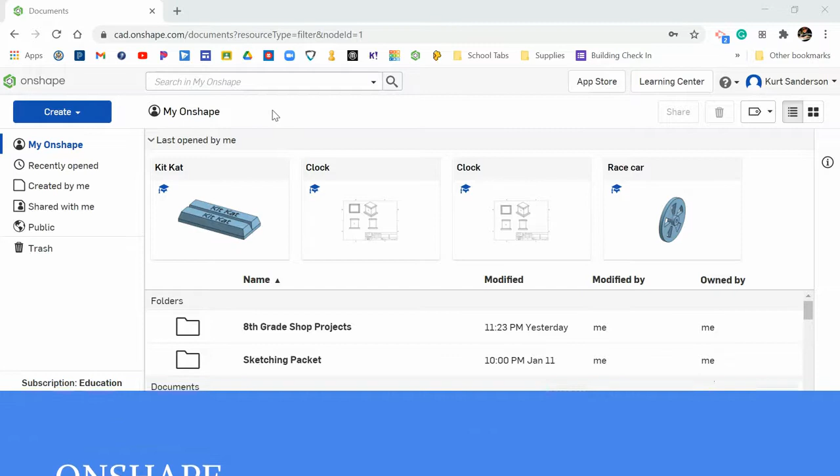Welcome everyone. We're going to be making the desk caddy project together in Onshape. From your Onshape dashboard, let's click Create Document and name it Desk Caddy.

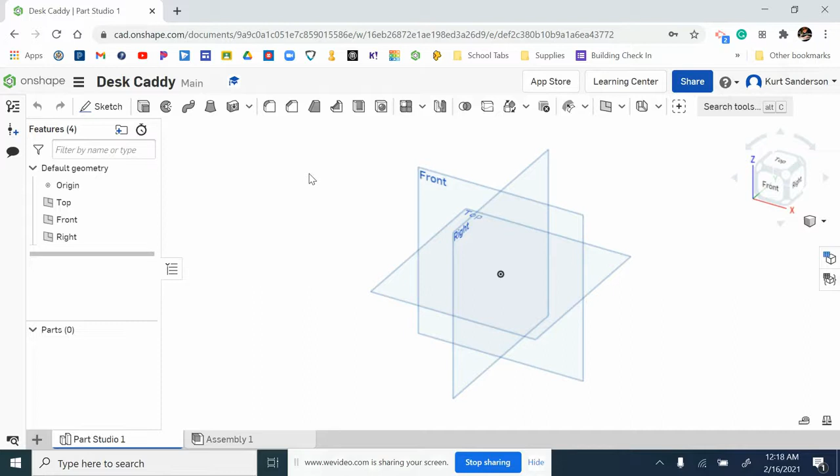From here, you can see your front, top, and right side planes, and we're going to sketch on the top plane. First, let's select Sketch, then click on only the top plane once with the left mouse button. You'll see that Sketch 1 aligns itself to be on top of that top plane.

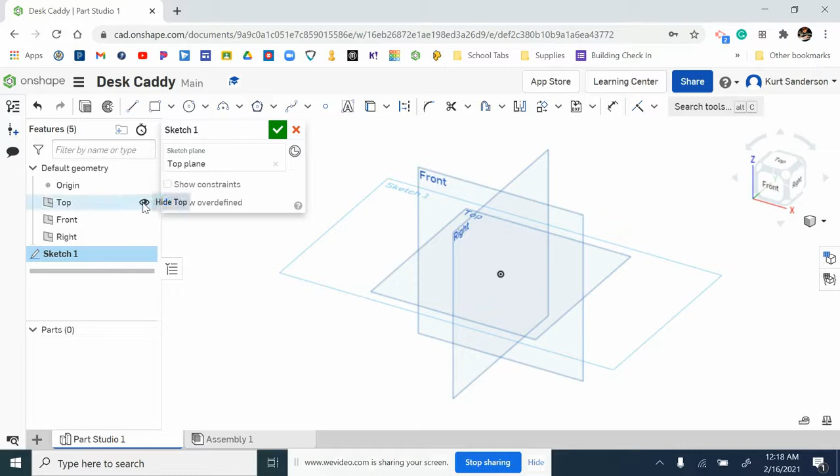Okay, we can turn those planes off to clean up our view here. Let's turn the top off, the front, and the side, so we're only left with Sketch 1. I'm going to right-click on Sketch 1 and view normal to the sketch plane. This is as if we were drawing flat on a desk now.

We're going to click on the corner rectangle tool, left-click the origin once, move your mouse. This is not a drag, this is a move. Move your mouse out, left-click again.

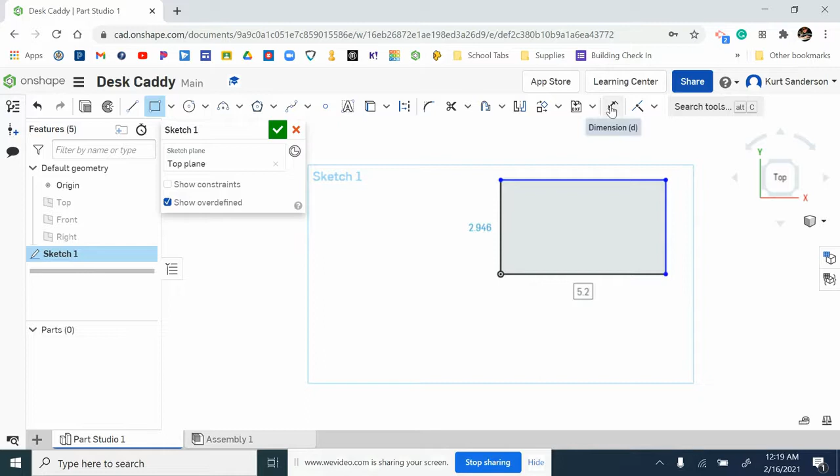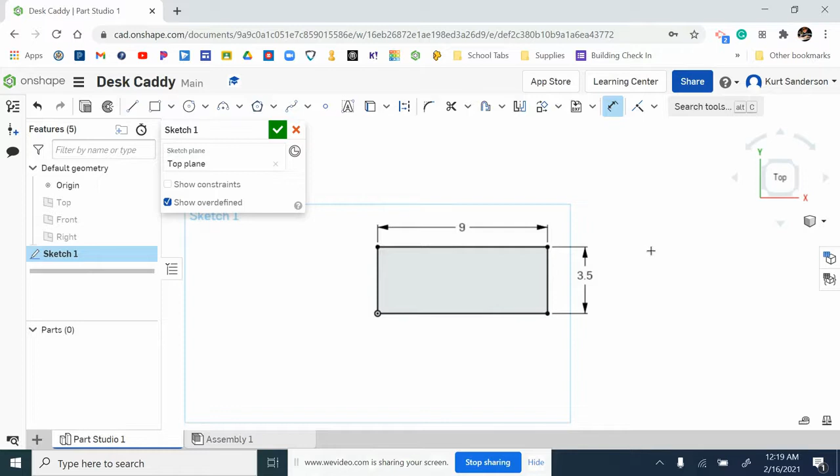Okay, we're going to click on the dimension tool, dimension the length. I'm left-clicking that top line, moving my mouse up, and left-clicking again. The length should be 9, enter. And the width should be 3.5, enter. And that sketch is done, so we can finish it with the green check mark.

Okay, so this is our two-dimensional view. You can see our view cube is showing top. We want to go back to our isometric view so that we can see more than one perspective.

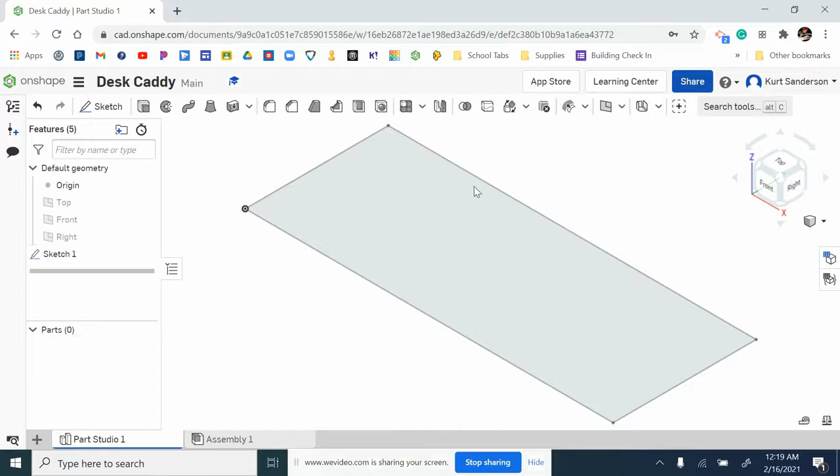Okay, we're going to extrude this rectangle, left-click inside of that rectangle, and then specify the depth. This is the thickness of the piece of wood as 3/4 or 0.75. Finish that feature with the green check.

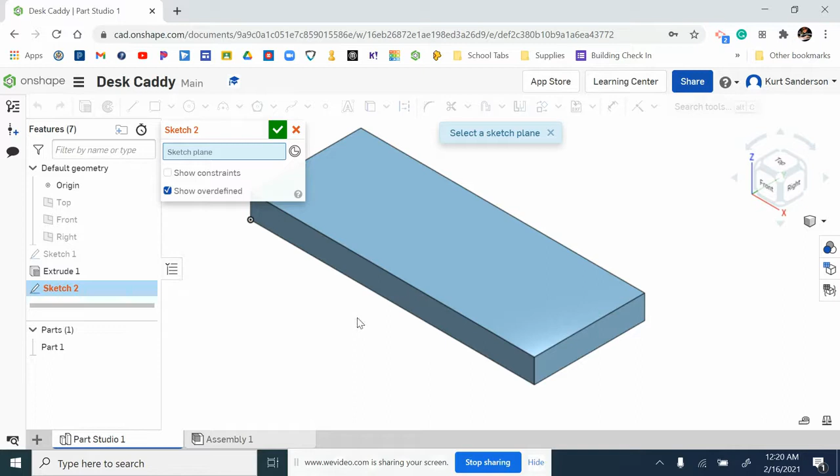Okay, we're going to start a new sketch, but this time we're not going to be clicking on one of those planes, top, front, or right. We're going to be clicking on the top surface. We want to do a sketch on the surface. So Sketch 2 aligns itself with that surface, and we can right-click, view normal to the sketch plane, as if we were drawing flat on our desk again.

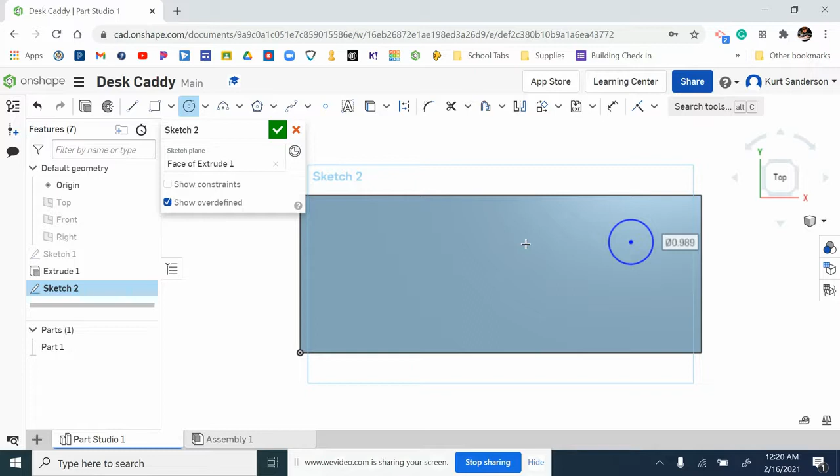We're going to grab the circle center point tool, and we're going to left-click, move, left-click. It's a random size in a random place. We're going to dimension it using 3 different dimensions.

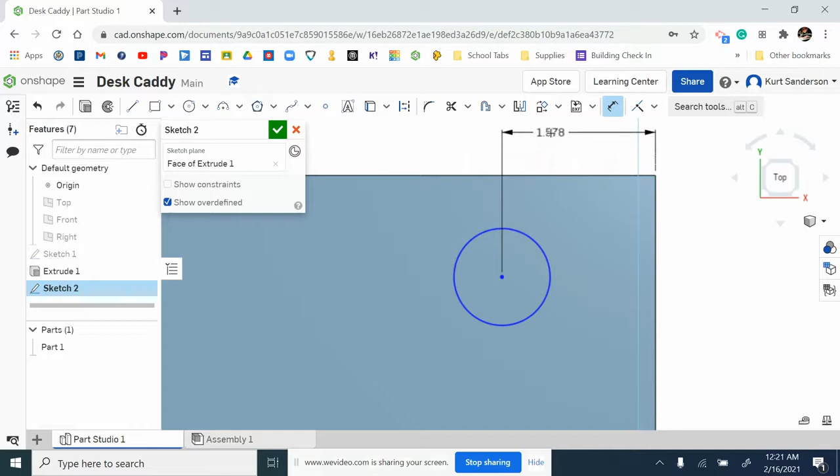Left-click the dimension button, I'm going to first click the corner point and then the center point. That's going to give me, if I move my mouse in the right place, a horizontal dimension. I can left-click right there, and I want that distance to be 1.75.

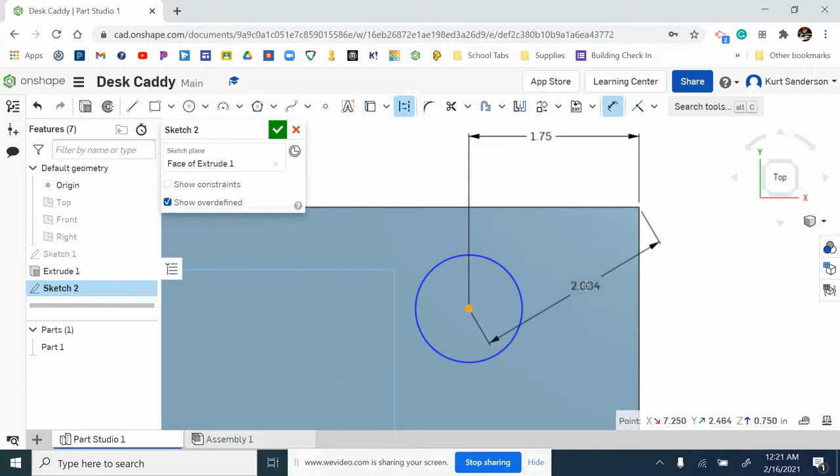I'm going to click on the same 2 points. My dimension tool is still highlighted, so I'll click corner point, center point again, and I'm going to move my mouse. I'm not dragging, I'm moving over to the side, left click to place it, and that distance should be 1.5.

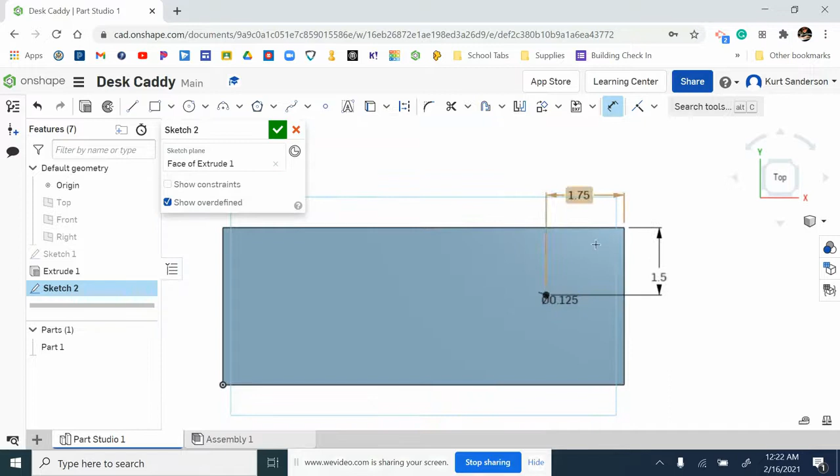Okay, this circle is much too large, so I'm going to click on the edge and specify a 1/8 diameter circle. Okay, it didn't go away, it's just quite small. Okay, so this sketch is done. Green check to finish. And then I'm going to extrude.

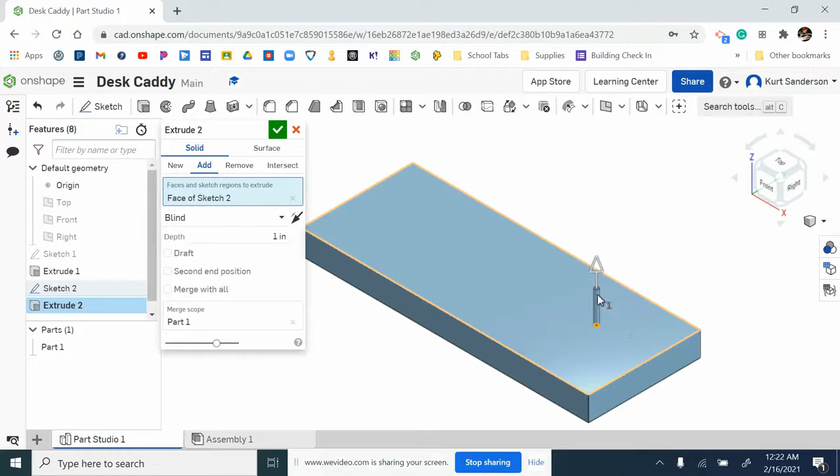I'm going to zoom in and click on that small hole. And if we go over to our isometric view, you can see that the computer thinks we want to add material, but we want to remove material. We want to drill through that piece of wood. So remove, green check. And you can see that it goes all the way through to the other side.

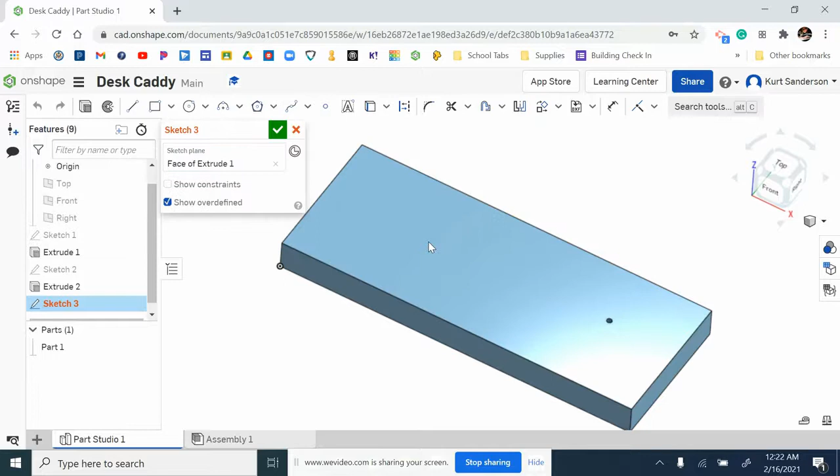Okay, we're going to create another sketch on this top surface. So left click, we have our third sketch. Let's view that normal to the sketch plane. We're going to create a center point circle somewhere in the bottom left-hand corner. So I will left click, move, left click again.

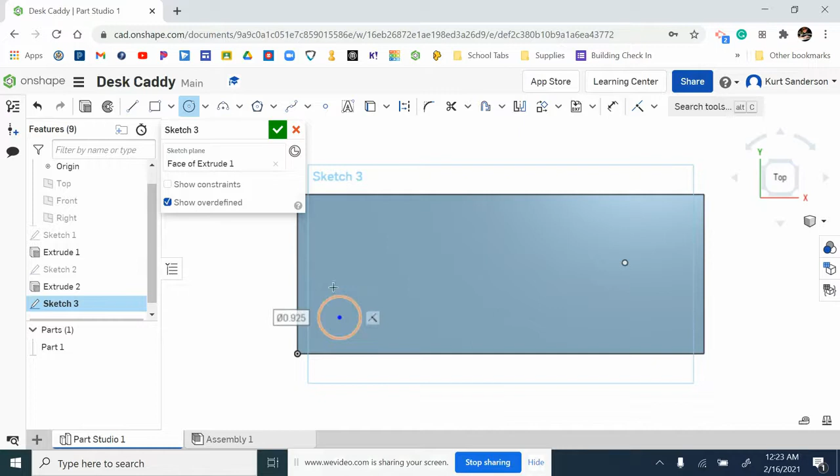All right, just like we did for this circle, I'm going to place 3 dimensions on this circle to get it into the right spot. My dimension tool is highlighted. Make sure that you're selecting your corner point, not the edge, but the corner, center, and I'm moving my mouse over, and I'll specify 1, enter.

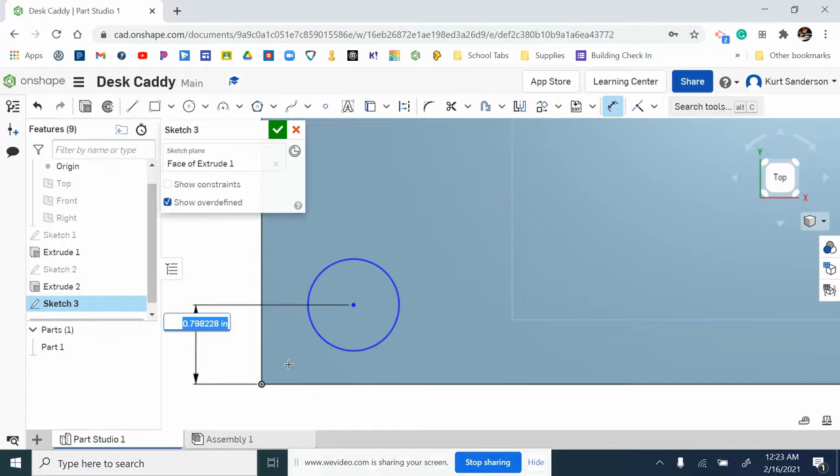Same 2 points, corner, center, move down, 1, enter. Lastly, I'm going to specify the size as a diameter of 1/2.

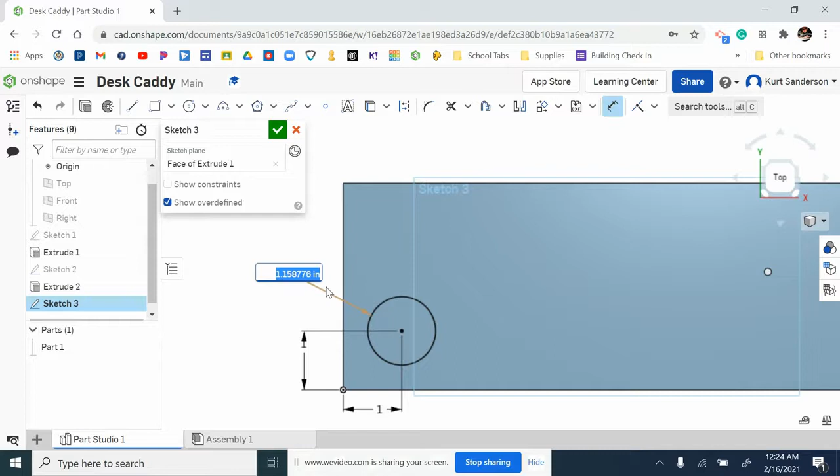So I want the exact same circle, the exact same size, in the exact same place on the other side of the part. So we're going to do what's called a construction line.

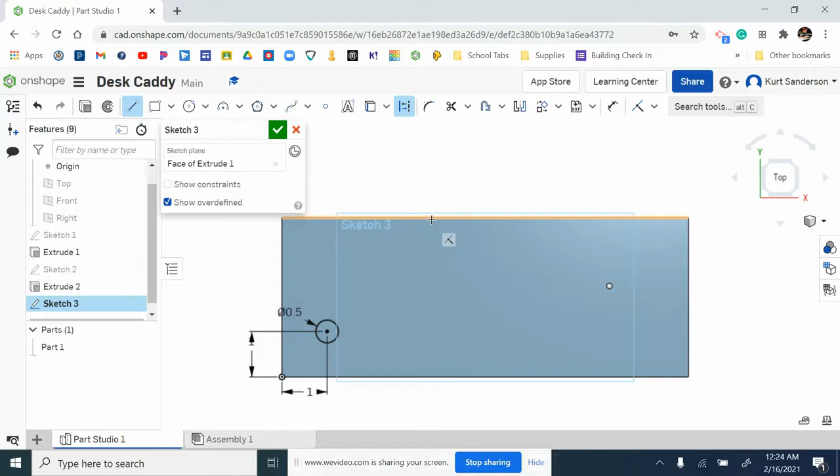I'm going to click on my line tool, select construction. I'm not clicking yet, but I'm looking for the midpoint. The midpoint will pop up as a yellow square. Now I can left click, bring my mouse down. I am not dragging. Bring my mouse down and left click again. And I will escape that tool.

I'm going to use my mirror tool and follow the commands. Select a mirror line - I'll click on my construction line here. Select entities to be mirrored - select my circle. Voila. I will escape out of that tool. If you are in a tool, if you select it again, it will get you out of that tool.

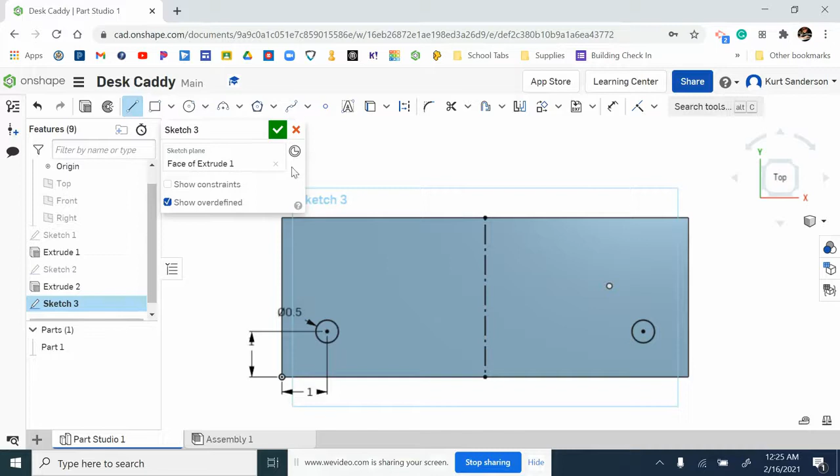I'm going to take my line tool, zoom in a bit, and I'm going to hover. I'm not clicking, I'm not dragging, I'm hovering over that center point, and I'm moving my mouse up. You'll see a dotted line. Once the center point and the circle are lit up, I'm going to left click.

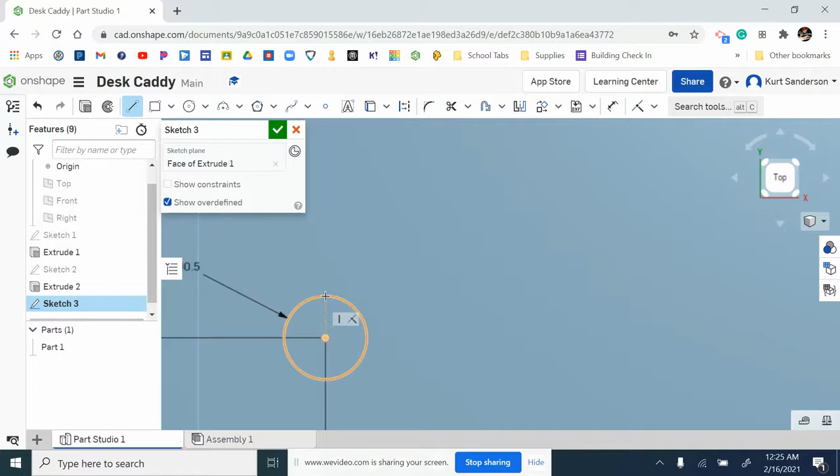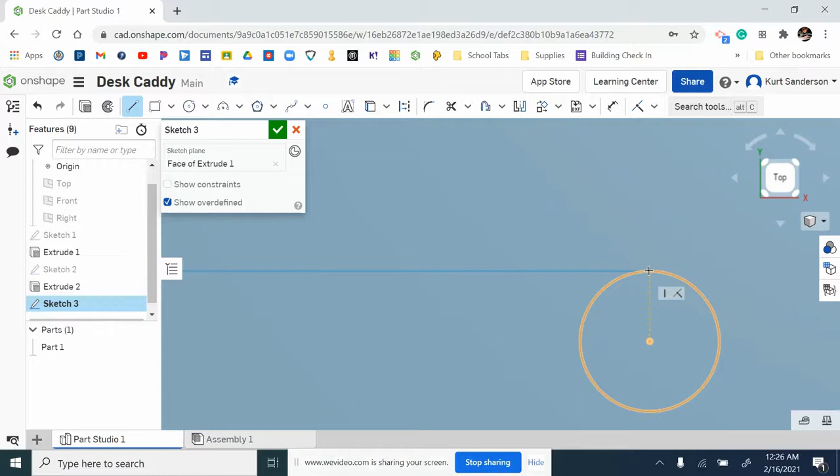I'm going to move all the way down to the other side and do the same thing. I'm not clicking yet, not dragging. I'm hovering and then moving up. When that center point and circle are illuminated, I will left click.

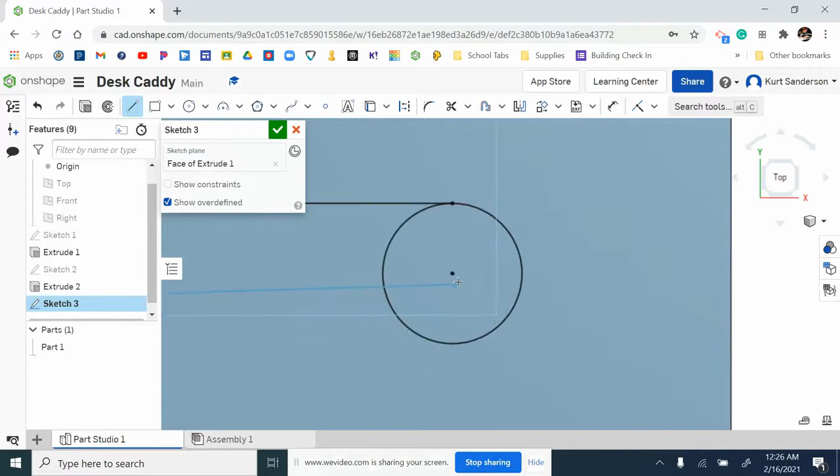I'm going to do the exact same thing on the bottom. I'll select my line tool, hover over the center point and move down till they're both lit up. Left click. Travel all the way down to the other circle, hover, move, click.

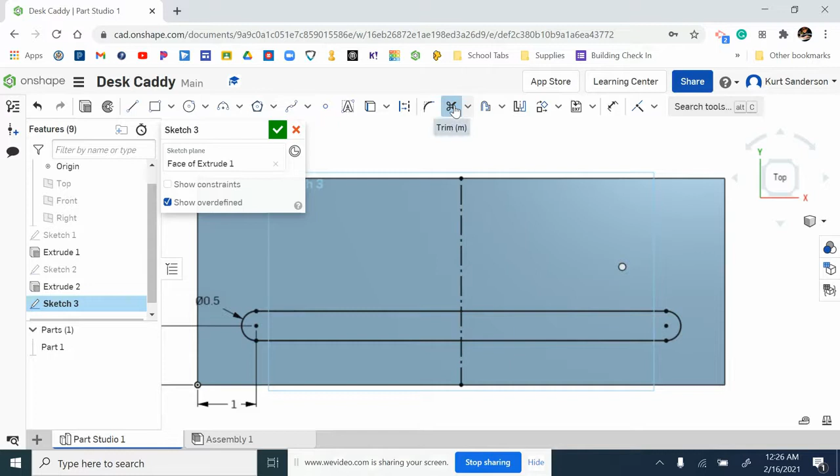Everything should be black. I'm going to trim using the scissors the inside of those 2 circles, and I can select that trim tool again to get out of trim. So this sketch is done. I can green check mark. I'm going to go back to my isometric view.

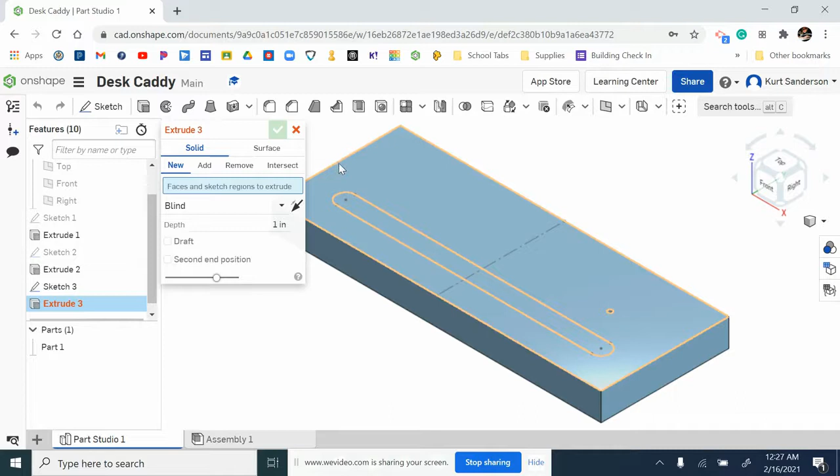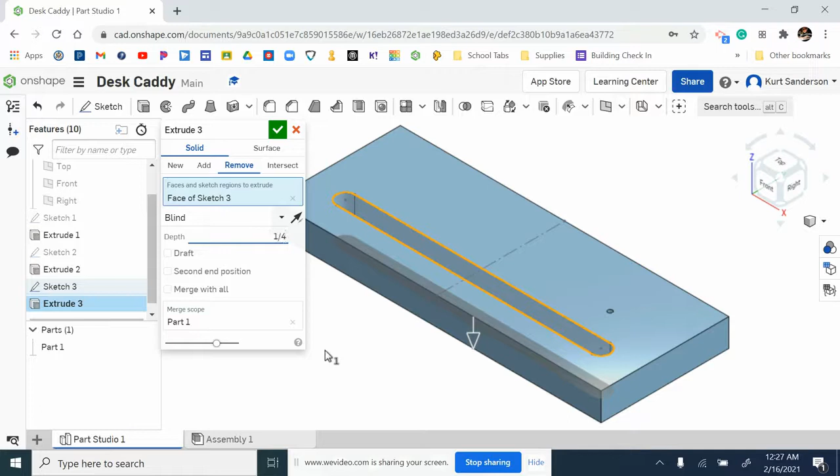And I'm going to extrude that sketch. I'm going to select on the inside of that sketch. The computer usually assumes you want to add material, but we want to remove material. This time we don't want to cut through the entire piece - we only want to extrude a depth of 1/4. Green check mark to finish that.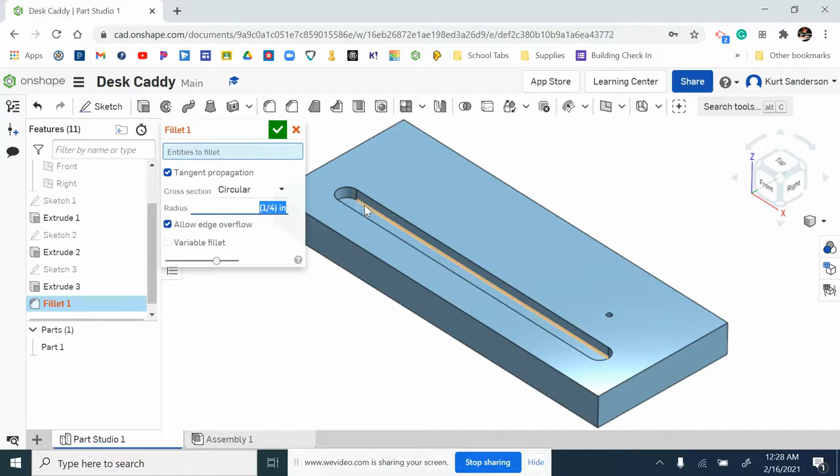Now, with the desk caddy, we have a rounded pencil groove, not a squared off one like this, so we're going to apply a fillet. Click on fillet, specify your radius as 1/4, enter, and then you can select that bottom edge. And it's going to round over that pencil groove. Green check to finish that feature, and that looks perfect.

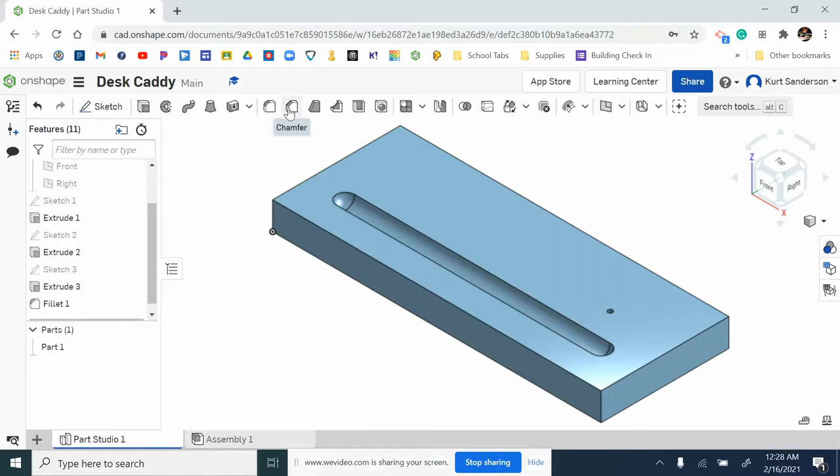I'm going to go back home to my isometric view, and we'll finish this project off with some chamfers. I'm going to click on the chamfer tool. I do want it to be an equal distance chamfer with a distance of 1/4. Enter. Now I can select the edge, not the face, but the edge. All 4 top edges. Green check.

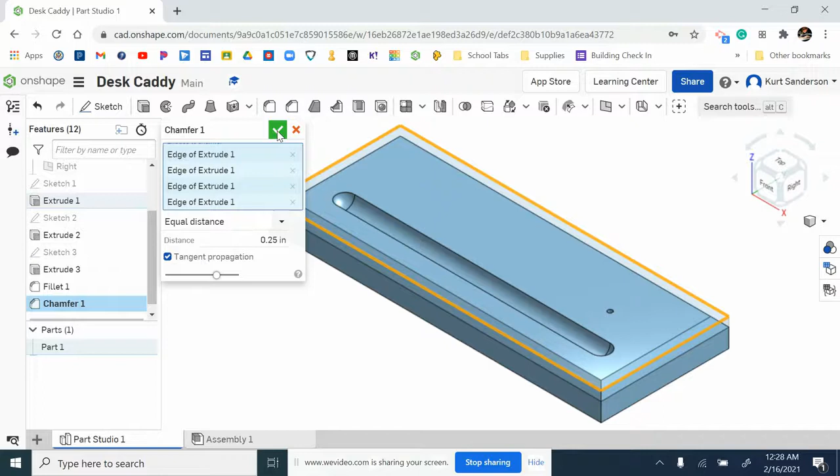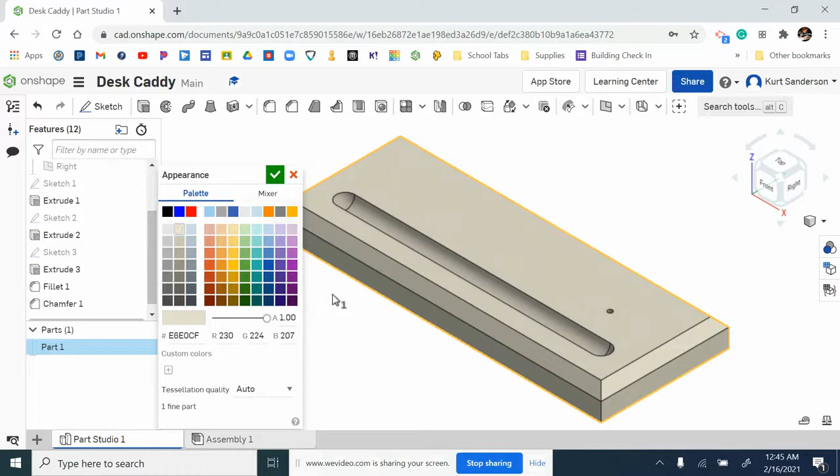I'm liking how this is turning out, except wood isn't blue, so we're going to change the appearance. Right click on part 1, edit appearance. And I believe that this is the color that looks most like the wood that we used in the shop. Green check mark, and this project is done.